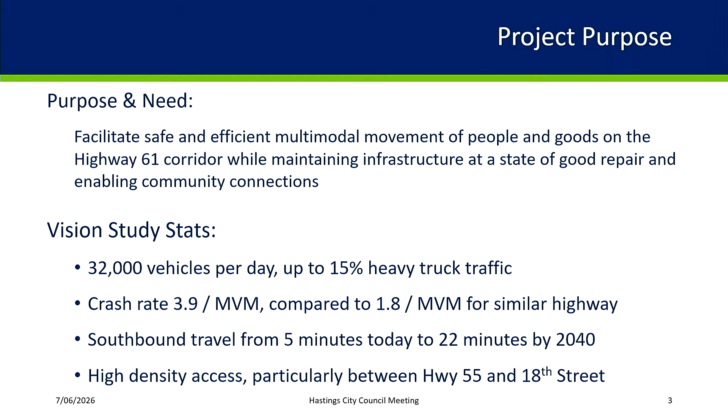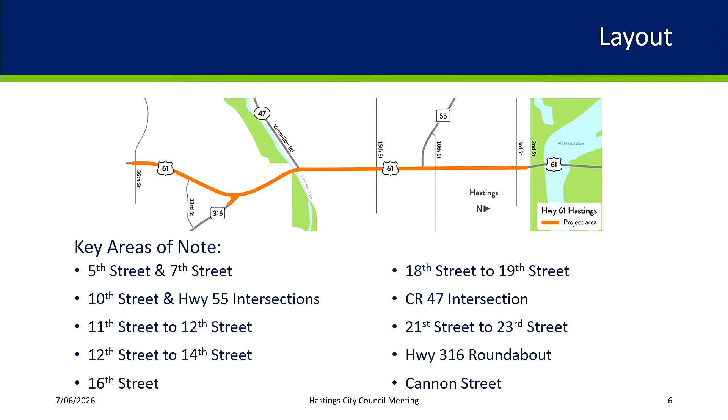All right, so I'm going to present a little bit more about the layout and where we are. I'm going to compare back to the vision plan that we have so I can point out where there are some changes, how we came through, so just some key areas of note. I'm not going to go through the whole plan, but just wanted to hit some highlights of different areas.

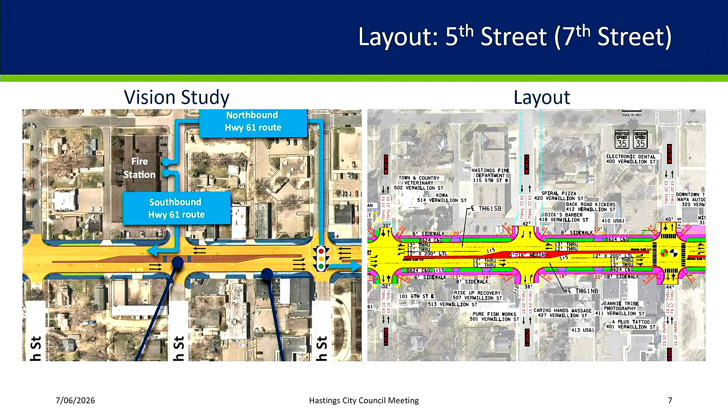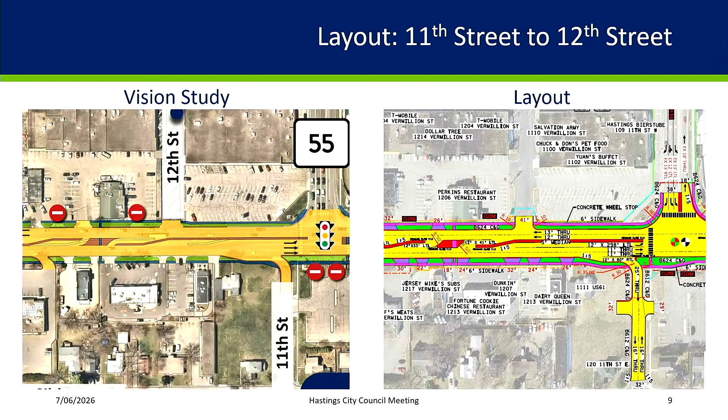Yes, and so because we need to extend the turn lane to get to 55, that northbound turn lane, we can't allow the other lefts through. So now, what we have talked about with the business owner properties is shifting their access to their southern driveway, allowing the left ins at that point. So some of our businesses still have lefts in while traveling north or south. Some don't. That's correct.

And those who don't, will we have an access - this is the perfect example - will there be an access there for a vehicle to turn around and go to the Dairy Queen, hypothetically, or into the strip mall to go to Dairy Queen, which isn't a direct connection? It's not a direct connection. On the, yes, let's keep it simple. Yes, they can do U-turns there.

Okay, we have also talked to the business about potentially, on the backside of that strip mall, there is a lane there, they have that drive-through there. Would they allow people to come through that way to get to the Dairy Queen as well, so they wouldn't have to do a U-turn? That's a separate conversation, but those are the things we're talking about as well.

It feels like a very far away from where we started. This seems to me like the topic of conversation over the years has been to increase safety and to slow down speeds and to help pedestrian movement. And now it's like...

So there's already a lane there. This is why I wanted to show the vision study as well, because the changes that we just talked about for that strip mall were a part of the vision study. Access management was part of the vision study as part of our ways to increase safety on there. With all the different movements that are going on today, it can be confusing both as a driver and as a pedestrian when you have to walk constantly across these driveways. So we looked for opportunities where we could close a driveway, change a driveway in terms of limiting lefts out or lefts in.

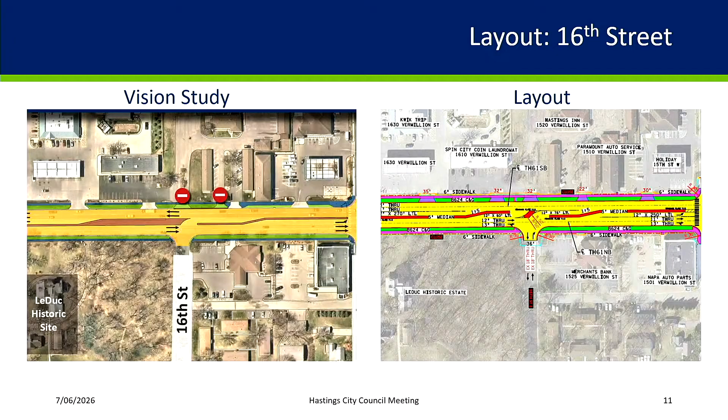But just to clarify, we are not allowing those left-outs from 16th. So if you are on 16th, you can't turn southbound, because you can go to 15th and use the signal to turn that way.

I've just pulled out of Merchants Bank. I took a right onto 61, and I want to go to Kwik Trip. I'm going to go to the light, cross two lanes of traffic, sit in the westbound turn lane, and flip a U-turn - which, by the way, when I flip my U-turn, people are getting their walk signal. So I'm going to flip my U-turn and go back from 15th to 17th to pull into Kwik Trip on the right, on the west side of the road. I'm just saying, to me, none of this feels like we're making it safer, especially for pedestrians. It doesn't feel like we are.

So my last question - at 17th Street, Kwik Trip, LeDuc - we're doing nothing there? So people can still cross over from the west side of 17th and go northbound, with no light, nothing? The light's on 18th. Okay, and that seems like a waste of time.

That's where we looked at that and determined where the signal should be - 17th, 18th, how does this work? And the light at 18th - but you're going to let people make a left out of there. They can make a left in at 17th, and they can make a left out, correct, that's still full access. That's a horrible intersection.

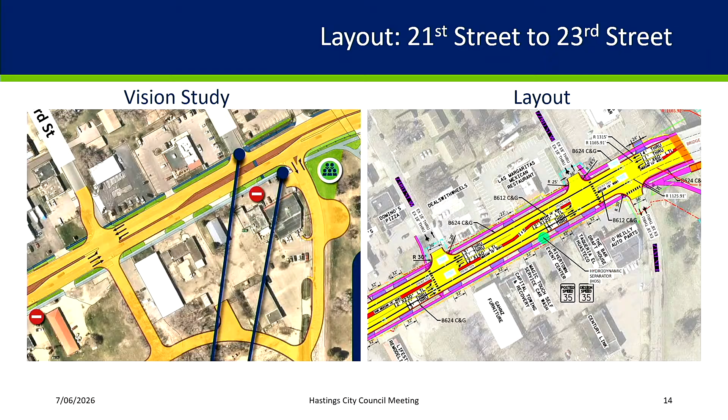We talked about that a little bit, so I'm going to move to the 316 intersection, planned as a multi-lane roundabout. I'll point out one of the conversations we had was this right turn lane from 316 onto northbound 61. It's a free movement today, if you think about that intersection.

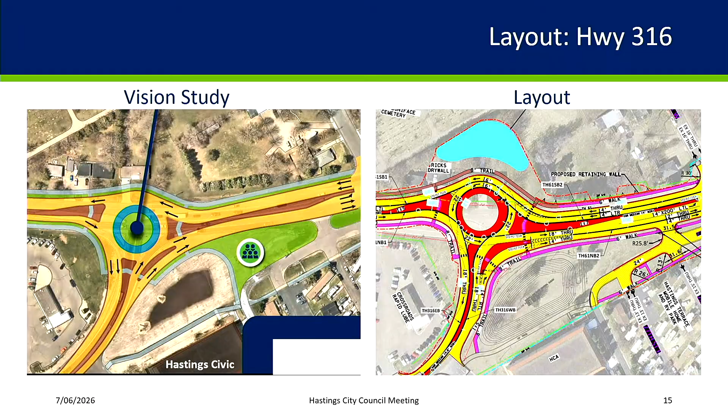Originally, our traffic group had said, what if we only had one lane in there? What if we didn't have that free right? Can we get by that way, trying to minimize as much as we can? If there's less road to take care of, that's better for everybody, but we still need those operations to work, we still need the safety. After reviewing and working with our geometric design group, this is the design we're moving forward with. It does keep that free movement in there, and it will help with those operations. That was something, as we went from the vision to looking at the layout and putting more engineering to it, that came up multiple times. We did have a version that only showed one lane, and we definitely heard about it from people who said you can't do that. So double check, triple check, take a look at it, and made that change here.

Last one for this layout portion, then I'll move into some other topics on the agenda. Cannon Street, we envision cutting that connection off, disconnecting it, and having that traffic flow either down to 36 or up to the other streets on the north side. This was another one working with some of the businesses in the area, with staff, looking at it. We determined let's leave that right in and right out in that area. So what you're showing on the layout keeps that connection in there. It prevents those lefts, which are the more dangerous movement, but still provides access to Cannon, reducing the amount of traffic that would flow to the other streets, and having that pedestrian connection across there as well.

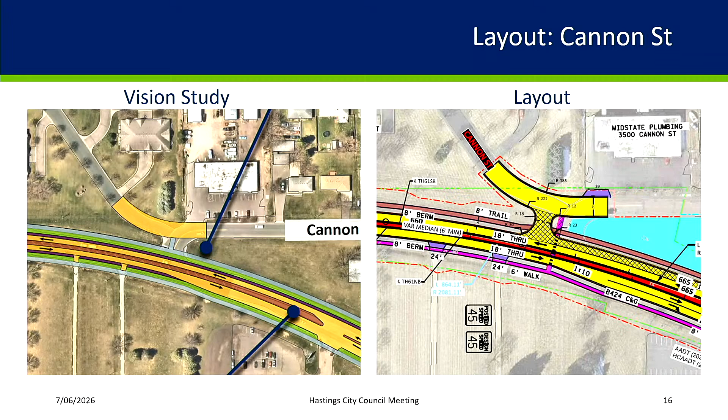What about the streets prior? 23rd, 24th, 25th?

Yeah, I'm not showing them here, they're on the back side. There's some change at 24th. 25th remains the same. Most of that section between the 316 roundabout and the 36 roundabout is a full depth reconstruction of bituminous, and that is not concrete like the rest of the project, but it is adding a trail on one side, an 8-foot trail and a 6-foot sidewalk, turning it into an urban section, so curb and gutter through that whole area.

You were talking north of 316 though, are you talking north? North of 316, so say 25th, 24th, they're right in, right out right now, or left, right, you can go whatever you want. So I'm just curious, so no changes? 24th, we would provide access management on that to reduce those to right in, right out. 25th remains open. And that will be shown on the layout. Okay, thank you.

All right, I'm going to move on. Excuse me. Brian? Oh yeah, sorry, go ahead.

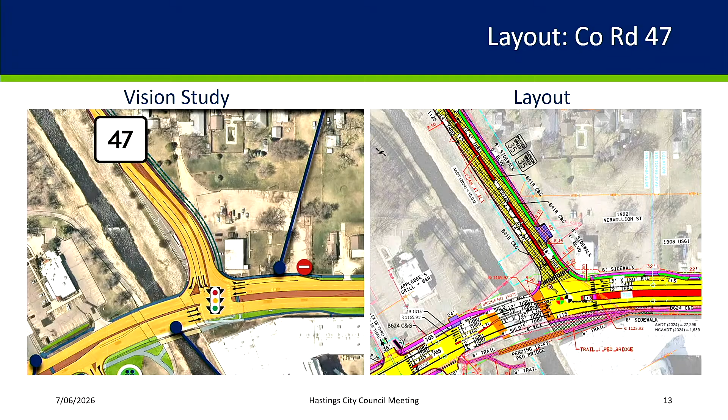So we'll force all bike and pedestrian traffic across that bridge. Okay, yes, thank you. Councilmember Beck, can I just shift back to 10th Street?

So there are some minor tweaks that we're doing to that right now, and we're trying to get it out by this week.

Sorry, back to the queuing situation - I take that way fairly often. And this is 61, I drive down to Red Wing every single day, this is my daily commute. There's already queuing. I understand the idea that eliminating that traffic coming the other way is going to free up green time. Is there going to be better green time for that intersection of 61 and 55? Because that's the problem - traffic lines up to 10th Street and into 10th Street heading southbound. And it's the same concept on 55.

So by eliminating the entrance to Walgreens, eliminating that there, now these left turns from 55 are going to be free flowing. But that lane already didn't have a lot of green time. We have eliminated the movements coming from Walgreens, so you take any green time associated with them and redistribute it.

If I were to go to Walgreens or come home from Walgreens to my house, I would just leave out of that entrance where you're eliminating it, which is gonna be very annoying for me, but that's besides the point. My light maybe lasts until my car goes through.

I was just gonna say, how much green time is there really? So even if you take the minimum amount of time, like call it 7 seconds of green time, there's yellow time, there's all-red time, so you're talking 10 to 15 seconds that could be redistributed on a 120-second cycle length - that's more than 10% that you're redistributing. So it doesn't sound like a big number, but when you're talking about seconds within a 2-minute cycle length.

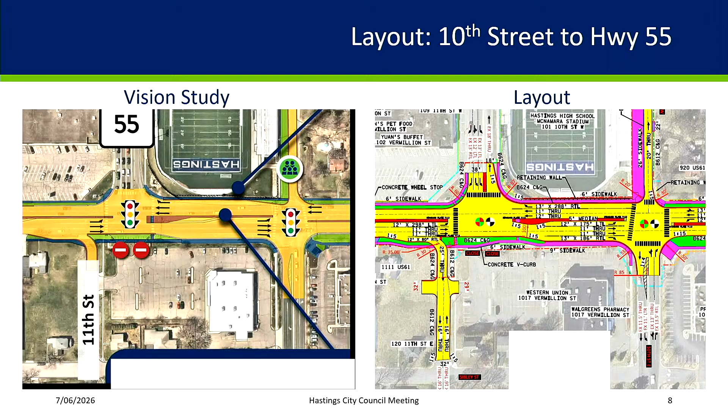Our traffic engineers did a study, we gave it to Ryan, they're looking at it right now. If there's something that we need to adjust, we will on that 10th Street. We're also looking at that whole new street there on 11th - is it all gonna be new? Yep, we're building it, and then we're gonna hand it back over to the city for that. A slight change to that will be on the new layout.

And if you look at those - I'm not a big traffic engineer - but 4 signal phases are what both of those signals are doing now. You cut those down to 3 signal phases, you guys are gonna notice a difference. It's gonna move traffic in there a lot better with the 3 signal phases.

I really hope so - I sat at that 10th Street light the other day for about 6 minutes before it turned green. That's a long time. Yeah, so they're gonna be brand new signals and new signal phases, into 3 phases, not just 4.

And then on the bright side, I'm really excited about the extended turn lane on 55. If you're waiting that long, I'm gonna ask our signal folks to get out there now, because we have 2 years till this project, and they need to rephase it now.

But yes, so I'm not too worried because you confirmed that I'll still be able to get my morning coffee, so thank you for that. It'll just be a little bit more annoying to circle back, but thank you.

Thank you, Councilmember Beck. Councilmember Pemble. Since you just said that we're talking about the years of this activity, I would like to start from scratch and say, okay, in 2027 we're gonna have some work start - is that correct? Yes or no?

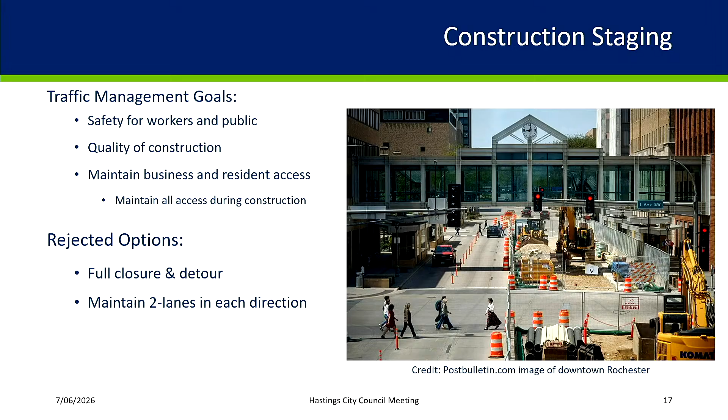So what we're left with is that middle ground of one lane in each direction, with turn lanes at some of the intersections. That is the base of just knowing we're going to go down to one lane in each direction.

With that, for people, that's the main thing we'll have to look at. Do we want to sign an alternative route? Do we want people to go to 55? That depends on some of the staging too. There's stuff we're looking at in terms of how we get people around. Do we keep everybody in that same corridor, one lane in each direction? Do we use alternative routes? What does that look like? So we have a base, but there are still a lot of questions on that.

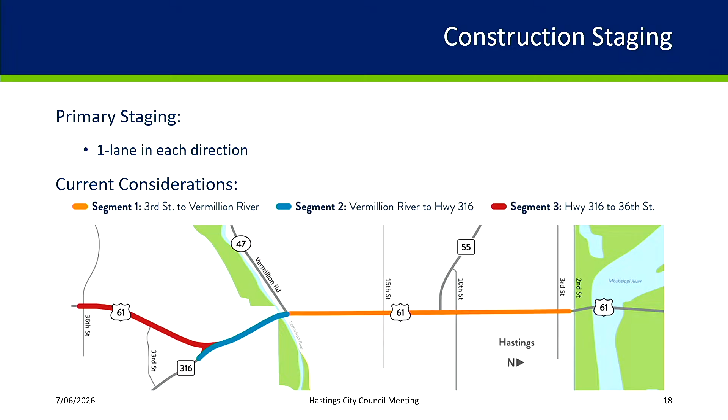I want to answer Councilmember House before you move on, because it could be a very important question. I'm just trying to limit us going back and forth on slides, so I am a little confused how we're going to do one roundabout in two segments. Could you speak on that? Because the roundabout is at 316 and 61, and that's at two sections. I'm just a little confused how you do that in two segments. It would likely be part of segment two. Yeah, we're not going to do half the intersection - I was just a little confused on that. Thank you, Councilmember House.

Councilmember Beck asked about the slide showing the phases - hypothetically, that's shutting down traffic coming off of the bridge heading southbound. No, that's crossing over. At some point, either north of the bridge, we would have to cross traffic over to one side, which is why we can't maintain four lanes. So picture you've got your two lanes of traffic, but now it's one in each direction on one side while we're working on the other. Thank you, Councilmember Beck.

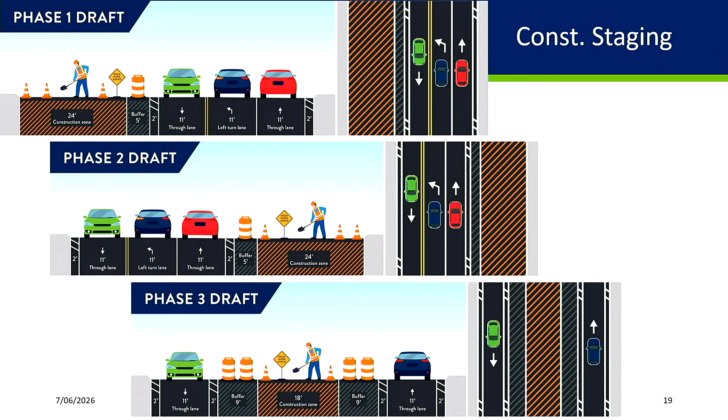Okay, so again, this is our initial base as we're looking at this. We're still in conversations with our contractor on how they envision building this, keeping in mind they're going to push to close down as much as possible because that's what they want to do, versus having input from you, the businesses, the public, and working with our own MnDOT and city staff to determine the best way to build this. That's a key point - we're going to be looking for more input as we continue. This slide just went through working on one side, traffic on the other, then flipping.

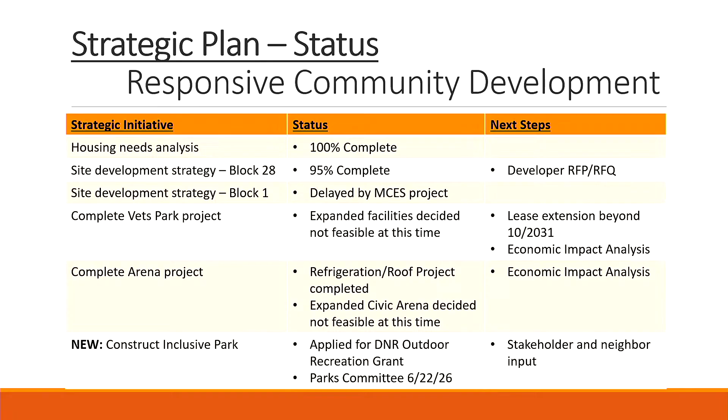Parks Committee also met just a week ago to talk about some of that project. Next steps would be some stakeholder and neighborhood input for the facility, obviously needing to look at budgeting and figure out finances for it, depending on the grant. We're hoping that construction would be 2027. So this is a project on the fast track.

In a broad area of infrastructure sustainability, some of this rolls back to the original plan, but with some updates. Planning for the water treatment system, the central plant's under construction. The eastern plant is out for bids and should be beginning construction this fall or late this summer. Planning is certainly well underway for the Veterans Home interconnect with our system.

The financial side is absolutely part of the planning for it and should also be noted. The western plant will be starting design later this fall, presumably, so that it could be out to bid and starting construction next summer.

The coordination of the wastewater treatment plant construction was delayed by the Met Council. They had originally planned on building a new facility immediately east of town. That is not viable for them. They're looking at options for pumping our waste stream west to a facility probably around Empire. From a capacity standpoint, we're fine. The existing plant is perfectly adequate, including for the next dozen years, but it certainly puts that construction element on hold.

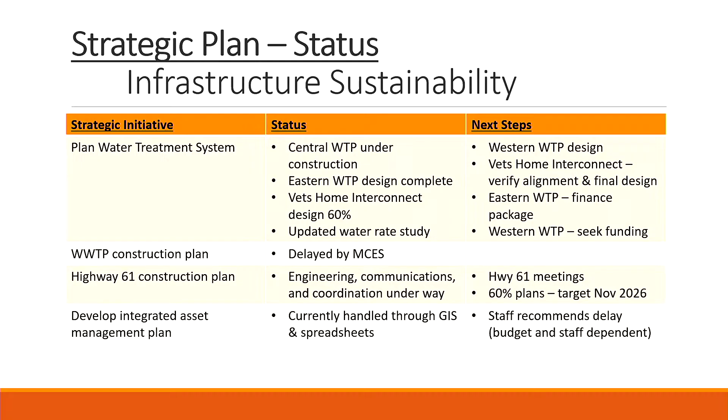We also have an interest in developing an integrated asset management plan. Currently, a lot of that work is being handled through spreadsheets and geographic information systems. Staff, engineering department, myself, we're recommending waiting on this initiative. Really, it's a budgetary impact, some questions about staff capacity. It's really an important piece that we'd like to see move forward, maybe still in '27, but realistically it's probably something we would recommend waiting on for future discussion.

The last broad category is strategic communications. Our prior coordinator, Dawn Skelly, did complete the comprehensive communications plan, a lot of that with input from various stakeholder groups that she met with internally with council and staff, but also some of the chamber and the DBA and other groups out in the public that we meet with or interact with.

There is an initiative about a media collaboration improvement plan, which may be a subject for a workshop. Even if not a workshop, I think there really needs to be some clarification about what's desired there.

Community engagement strategy, I think we're shifting. During the first couple of years, it had a strong emphasis on technology enhancements and some tremendous work by Dawn Skelly in those areas. We also, in December, went live with a new redesigned website, which is mobile-friendly and meets accessibility requirements ahead of the federal deadline.

But as I mentioned, some transition. I think we're going to continue focusing on engagement, but as a matter of not just the technology side, but how do we hear and gain public input, whether it's continuing our every 3-year survey, or the MnDOT meeting coming up next week.